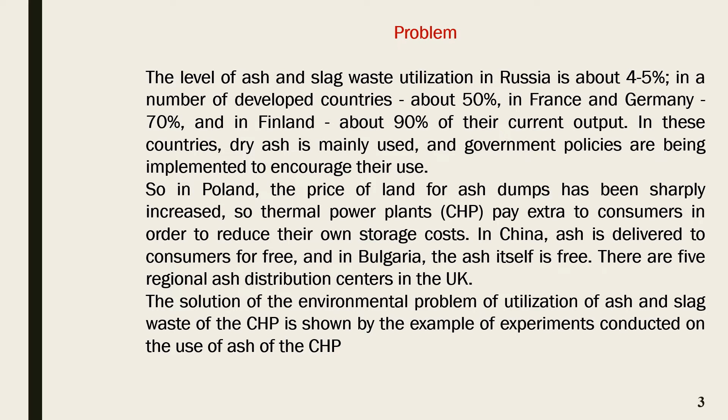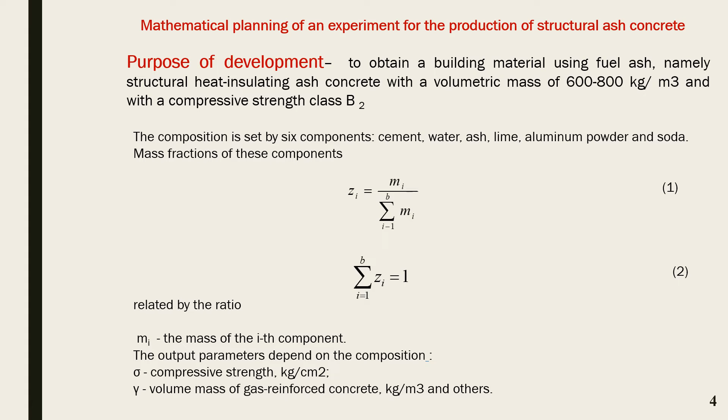Mass fractions of the components are related by the ratio. m i, the mass of the i-th component. The output parameters depend on the composition. Sigma, compressive strength kg/cm2. Gamma, volume mass of gas reinforced concrete kg/m3, and others.

The strength and the usual mass of aerated concrete, in which sand is used instead of ash, is determined by the ratio of the mass of water, sand, additives D3-24 to the mass of cement, respectively. Therefore, we will take the following ratios as factors. The ratio of the masses of water, ash, lime, additives D3-24, soda respectively to the mass of cement included in the composition.

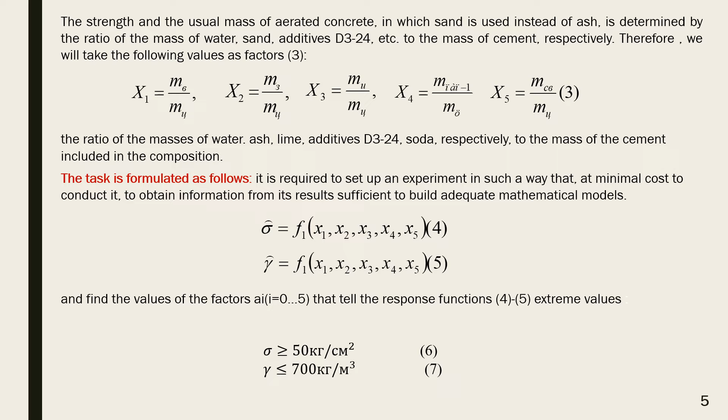The task is formulated as follows. It is required to set up an experiment in such a way that at minimal cost to conduct it, to obtain information from its results sufficient to build adequate mathematical models, and find the values of the factors that would give the response functions extreme values.

To build response surfaces, the method of steep ascent is used. In this method, each of the factors varies at two levels. Factors close to those in the production of conventional concrete were used as levels, where assessment for ash levels was carried out by conversion to sand according to the content of aluminum dioxide in them. The lower level is encoded as -1, the upper +1.

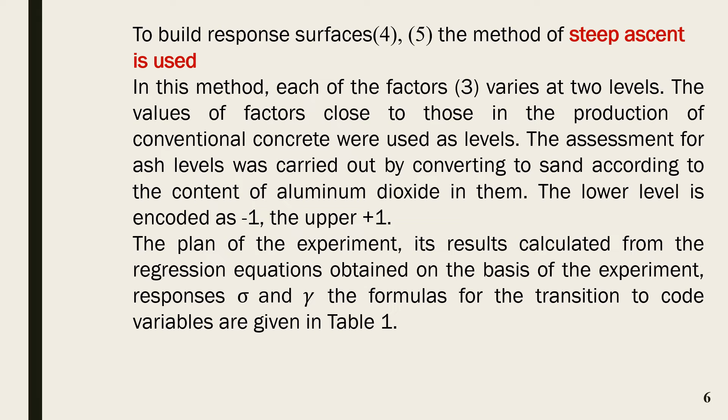The plan of the experiment, its results calculated from the regression equations obtained on the basis of the experiment. Responses sigma and gamma, with formulas for the transition to code variables given in Table 1. The plan of the experiment, its results. Table 1, factors and their levels in the first series of experiments.

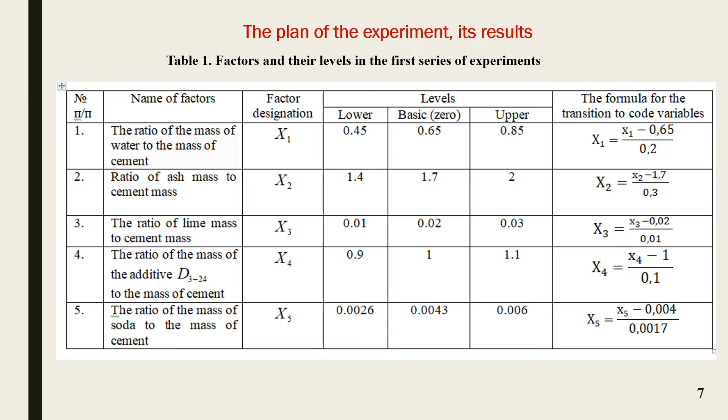Next. To find the composition, mathematical planning of the step-by-step optimum search experiment was used. At the first stage, five factors varied. The ratio of the mass of water to the mass of cement in the range from 0.45 to 0.85. The ratio of ash mass to cement mass in the range from 1.4 to 2. The ratio of lime mass to cement mass in the range from

0.01 to 0.03. The ratio of the mass of D3-24 to the mass of cement in the range from 0.9 to 1.1. The ratio of the mass of soda to the mass of cement in the range from 0.0026 to 0.006. The experimental plan, its results, and the responses sigma and gamma calculated from the regression equations obtained on the basis of the experiment are shown in Table 2.

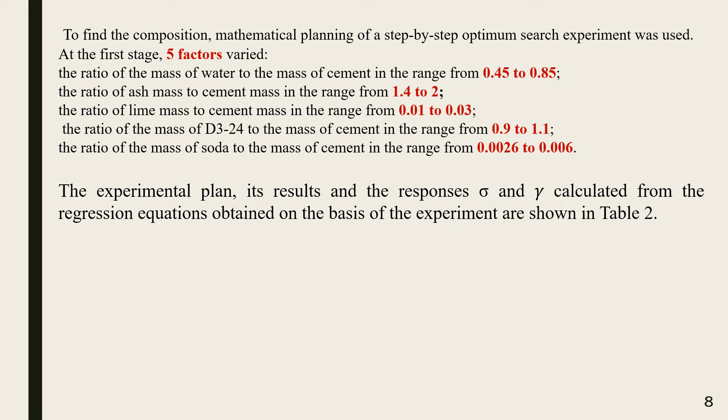Experiment of the first stage by the method of steep ascent. The plan of the experiment of the second stage was developed and implemented. Regression equations have a form. The values calculated according to these equations are given in Table 3.

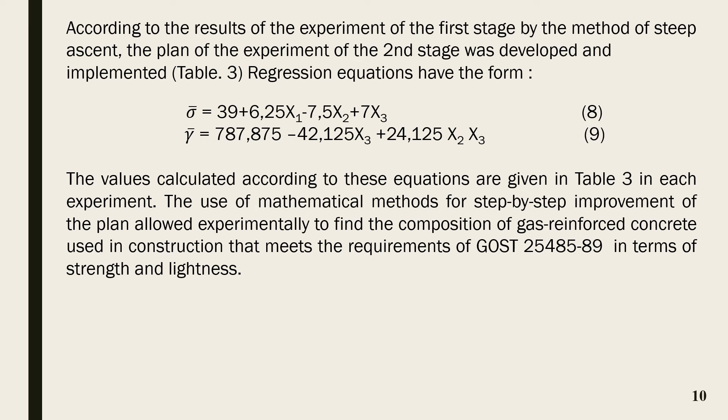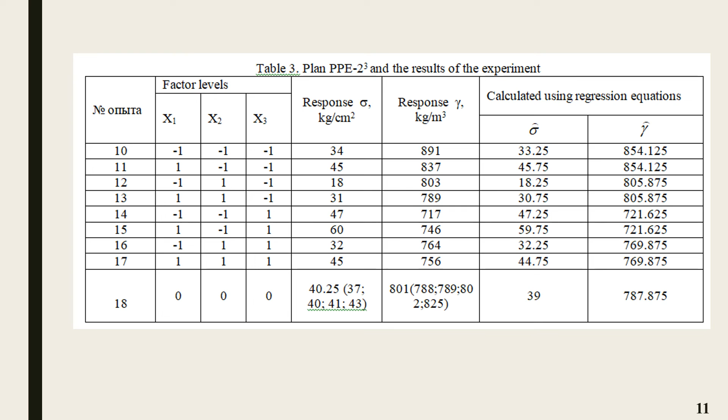Let's summarize briefly what we've looked at. Firstly, in modern conditions, the crisis increases the severity of the problem of disposing of ash and slag materials from combustion of coal in thermal power plants. The accumulation in increasing volumes leads to a rapid increase of environmental, social, and economic costs because of the extremely

low level of utilization. Secondly, the use of ash waste saves the cost of basic expensive materials without compromising the quality of the product, simultaneously solving the disposal problems with slag materials. Thirdly, the use of waste increases profitability. Fourthly, ash and slag waste processing allows to stabilize the environmental situation in the country.

Fifthly, a complex use of natural raw materials and waste leads to an increase in the level of the national economy of materials and goods. Rational distribution of productive forces reduces different cost items and therefore enhances the efficiency of capital and investments in the national economy.

Sixthly, the use of mathematical methods for phased improvement of the plan allowed experimentally to find the composition of ash concrete used in construction which for strength and lightness meets the requirements.

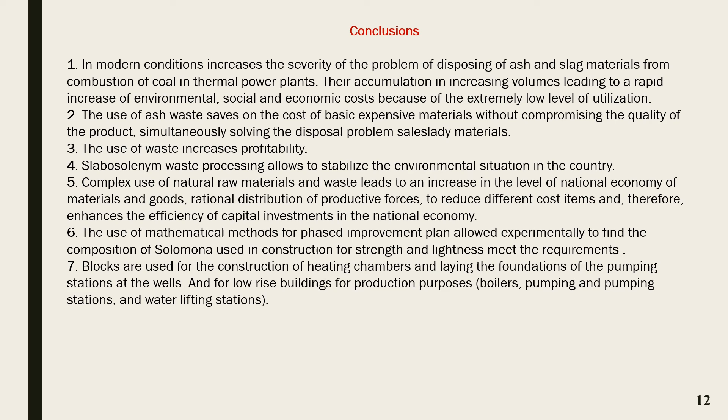Blocks are used for the construction of heating chambers and laying the foundations of the pumping stations at the wells. And for low-rise buildings for production purposes, boilers, pumping stations, and water lifting stations.